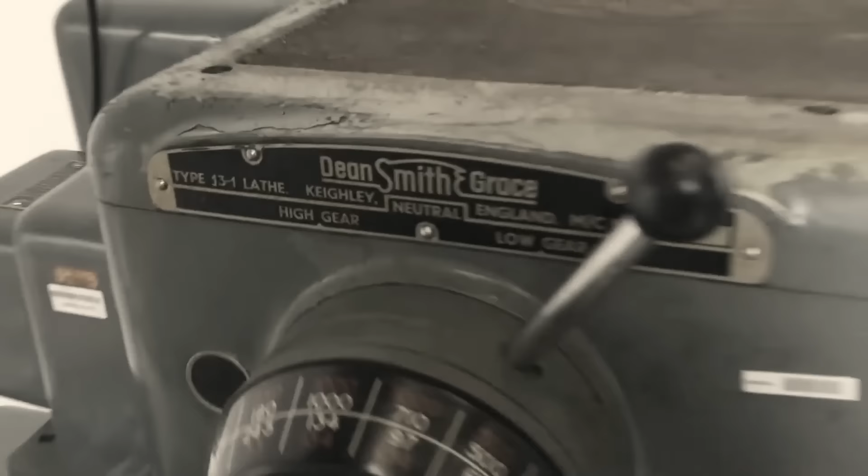Dean, Smith and Grace. If you ever served your time in a British toolroom, you knew the name, and you knew you had to earn the right to lay your hands on one of their lathes. These were the machines Rolls-Royce trusted to turn the parts inside its aero engines. At their peak, around 1,000 men in white made-to-measure overalls worked the Keighley shops, and 1 in every 5 lathes in wartime Britain came from beside the Worth.

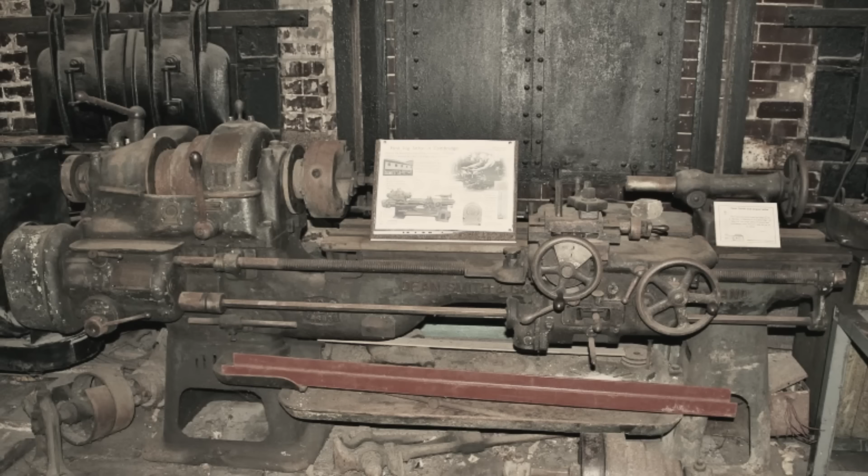They came through 2 world wars. They survived the Depression, foreign competition and rivals that fell away around them one by one. And then, after more than 120 years of making, the gates closed, and the town that had timed its very holidays to the works fell quiet. How does a firm the finest engineers in Britain trusted, a firm that survived everything, simply disappear from the town it built? Chapter 1: The Men Who Borrowed the Land.

Keighley sits where 2 rivers meet, the Aire and the Worth, in a fold of the West Riding, under the gritstone moors that climb towards Haworth. In 1865 it was a wool town, growing fast, loud with the clatter of looms. And in that year, 3 men borrowed money to buy a patch of land from the Duke of Devonshire, and set about building a works. Their names were Joseph Dean, James Smith and John Grace.

Dean was the eldest, born in 1824 over in Barnoldswick, a man the works would remember for the rest of its life as Old Dean. Smith had come into the world in 1834, Grace in 1840. 3 Yorkshiremen, none of them wealthy, all of them certain of one thing.

A town full of machines would always need someone to build the machines that built them. That was the trade they chose. Not cloth, not wool. Machine tools. The lathes and planers and boring mills that shape the metal everything else is made from. In a town that lived and breathed textiles, they went one level deeper. They would make the tools behind the tools, and on the land they'd borrowed against, beside the Worth, they raised the Worth Valley Works. It was a hard start.

Machine tools are a slow, capital-hungry business. You spend money for months before a single finished machine leaves the shop, and you carry the debt while you wait. For years the 3 men carried exactly that. There are stretches of the early story where the partnership's survival looks like a near thing, a matter of one good order arriving before the money ran out.

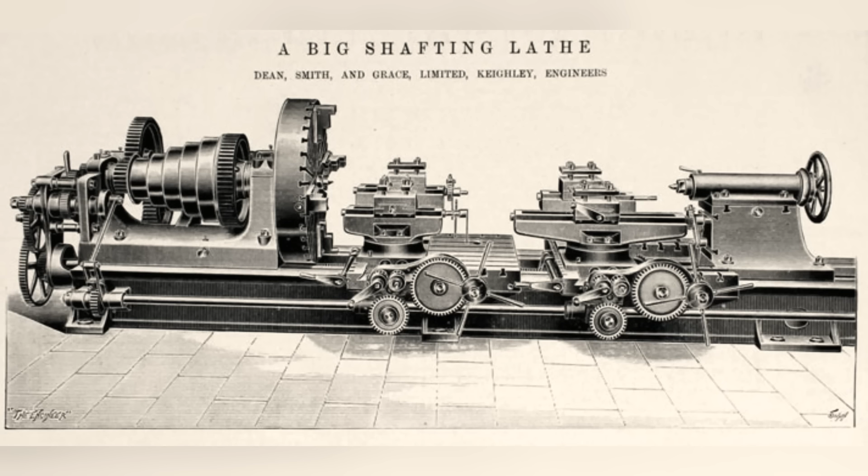But the orders came. By the 1881 census, the firm employed 75 men and 30 boys. A proper works now, apprentices coming through, a name beginning to travel. And by 1883, the debts were clear. They owned what they had built, outright, at last.

What turned it was the quality of the thing. A DSG catalogue from 1889 lists the customers they were already chasing and winning: locomotive builders, marine engineers, ordnance manufacturers, boiler makers, shipbuilders. Government contracts among them. This from a firm barely 20 years old, run by 3 men who'd started with borrowed money and a field. They were not making cheap machines for the local mills. They were making heavy, serious machines for the people who built the engines of an empire. And those people had noticed.

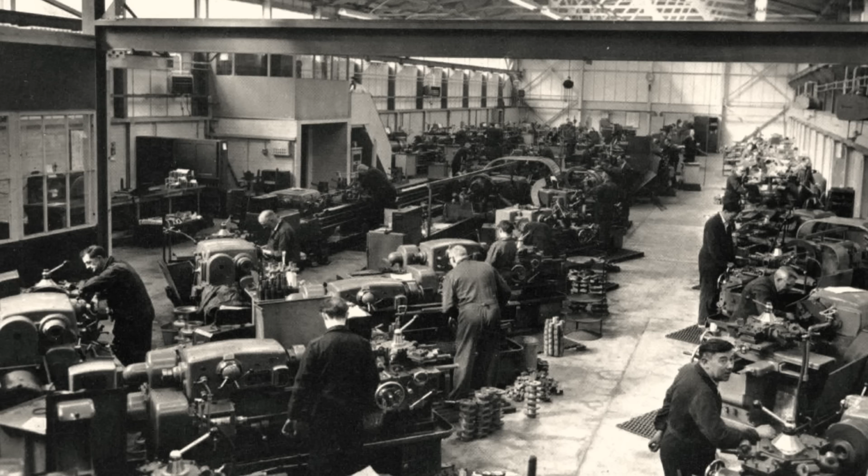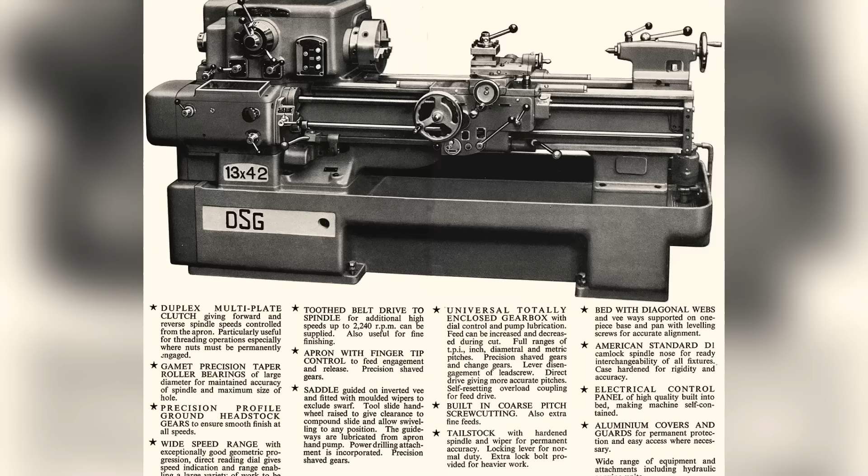There's a phrase that machinists still reach for, more than a century on, when they talk about a Dean, Smith and Grace lathe. They call it the Rolls-Royce of Lathes. It's worth understanding, before we go any further, exactly what that meant, because it wasn't a slogan the firm invented, and it wasn't loose praise.

It meant a machine built without compromise, hand-fitted by men who took days over work another firm would rush in hours, engineered so far beyond what the specification required that it would still be cutting true half a century later. It meant the most expensive way of doing a thing, done properly, because the people who built it could imagine no other way. That instinct, do it properly, whatever it costs, built the firm. In the end, it would also be part of what killed it. But that is a long way off yet.

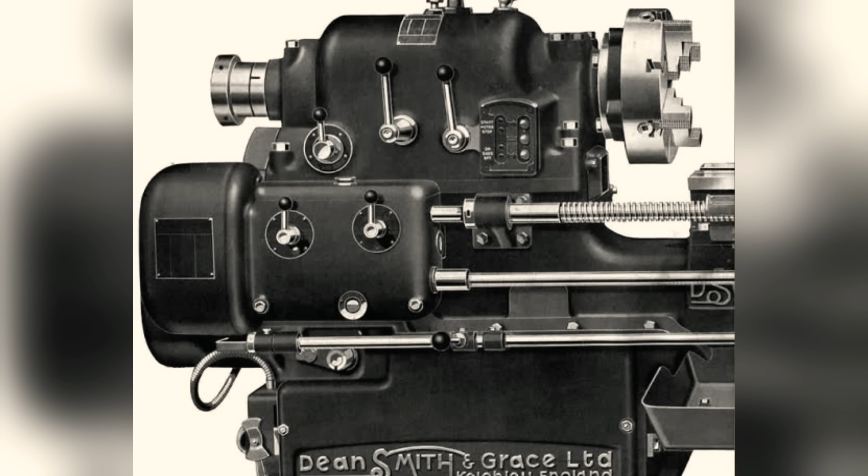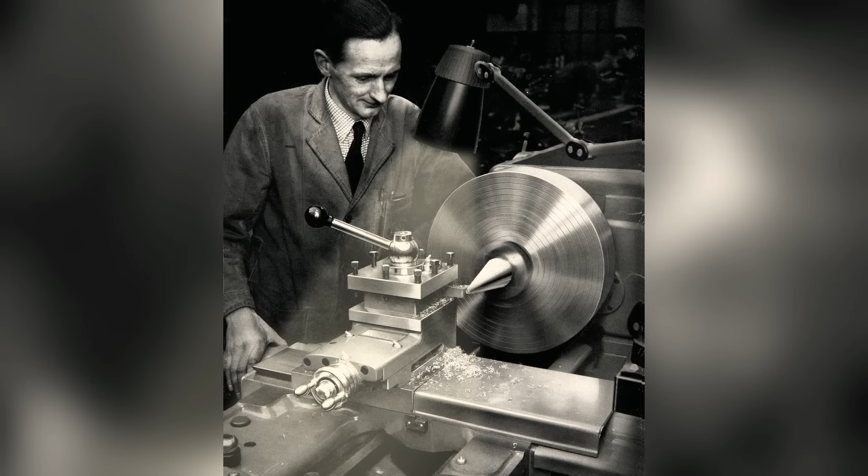In the 1880s and 1890s, it was simply making them the best in Keighley, and then among the best in Britain. The partnership formalised itself as the years passed. It became a limited company in 1898. 10 years later, in 1908, it reconstituted as a private company, Dean, Smith and Grace, 1908, Limited, the name it would carry through both world wars.

The founders were aging by then. Grace died in 1904, Smith in 1906, and old Dean himself in 1909 at 85, having seen the field beside the Worth become one of the great engineering names of the West Riding.

They left behind more than a works. They left behind a way of thinking about a machine, that its worth was measured not in what it cost to make, but in how long it would go on being true. Everything that followed grew out of that single, stubborn idea.

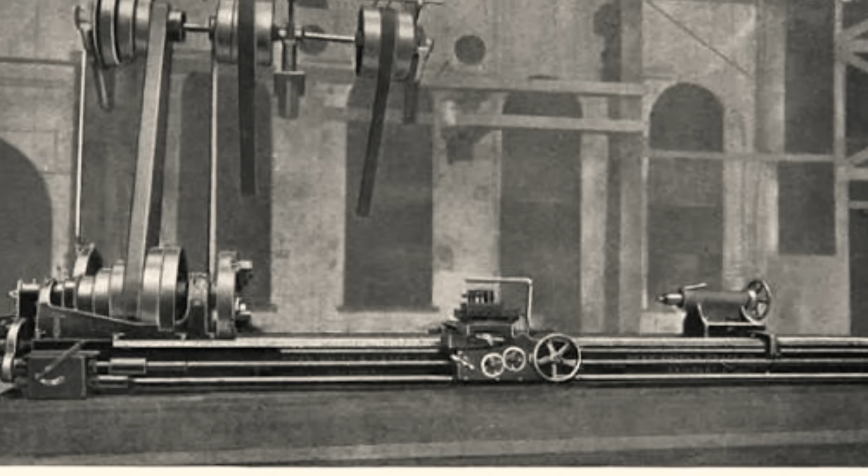Chapter 2: Built for brute force. The moment that made Dean, Smith and Grace what it became arrived not as a decision in a boardroom, but as a new kind of metal.

Around the turn of the century, a revolution swept through every machine shop in the industrial world: high-speed steel. Cutting tools made from it could bite into metal far faster than anything before, and they generated forces to match. Suddenly, the old lathes, built for gentler work, for slower speeds, began to flex and chatter and shake themselves loose under the strain. The tools had outrun the machines holding them.

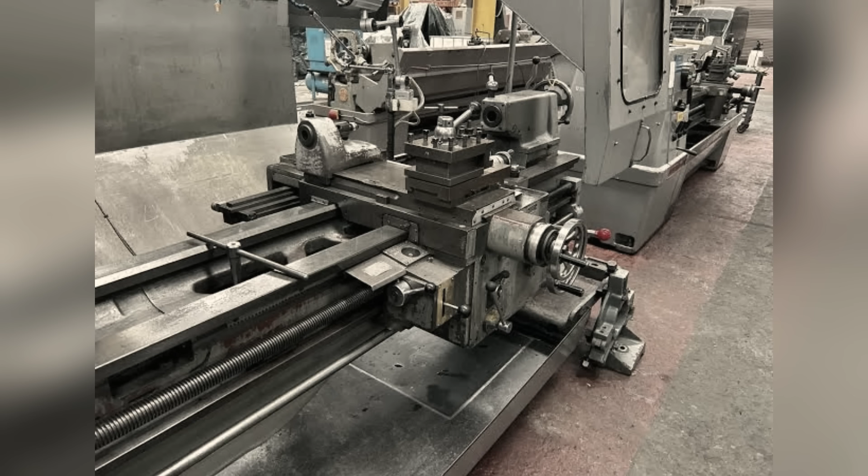Most firms responded by patching the old designs. DSG did something else. They stopped building bespoke machines to each customer's whim and concentrated instead on a single idea taken to an extreme: rigidity. A lathe so massive, so heavily geared, so utterly unwilling to move under load that the new steel could be driven as hard as it would go, and the machine would simply stand there and take it.

How far they took it is best measured by a figure from 1904, when the American trade journal American Machinist described a new 16-inch DSG lathe. It could strip metal at a rate of 1,800 pounds of chips an hour. 1,800 pounds, the better part of a ton of steel, reduced to swarf every hour by a single machine.

For its day, that was an astonishing, almost violent number. It announced that a small firm in a Yorkshire wool town had re-engineered the lathe around brute force and beaten the field at it. The engineering underneath was quietly brilliant.

The beds were cast not from ordinary iron, but from a high-strength mixture the trade called semi-steel, hard enough to register around 200 on the Brinell scale, ribbed diagonally, so the ways stayed stiff while the chips fell clear.

The headstock spindles were massive, carried on 3 bearings, the front bearing on the largest machines swelling to nearly 7 inches across. There was a patented spindle nose they called the fast lock, and the option of precision: Timken taper roller bearings, or plain white metal ones fitted by hand.

But the defining quality was simply mass. Weight. Their smallest lathe, the so-called baby of the range at 13-inch swing, weighed getting on for 3 times what a Colchester Student weighed, and 80% more than a Colchester 15-inch Triumph, a machine of larger nominal size. A DSG was, pound for pound, in a class of its own.

There's a line the enthusiasts use that captures the firm's whole attitude. It did not demean itself producing piffling little lathes. It made only, as they put it, very serious machinery.

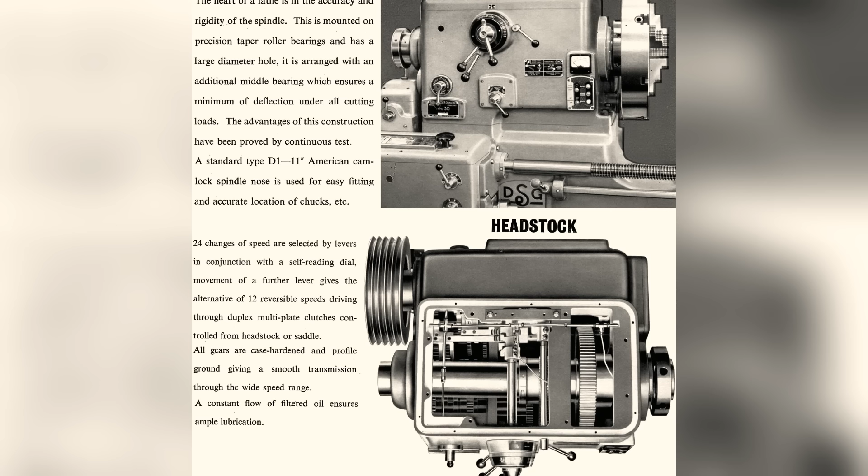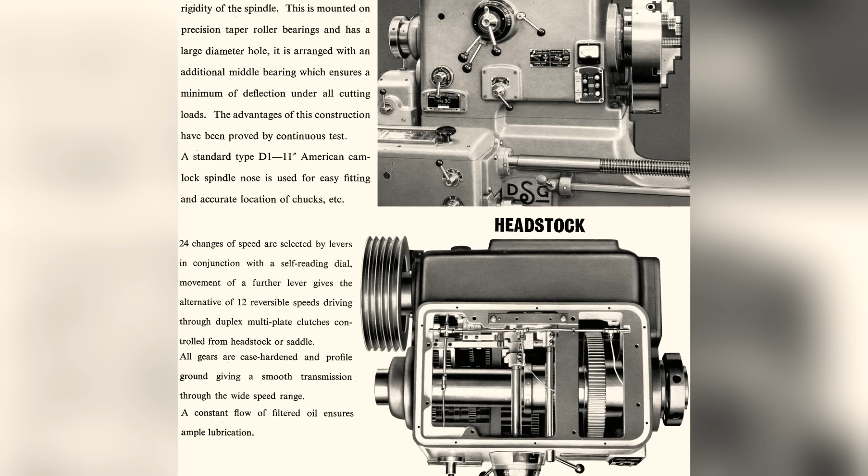It had rivals, and good ones. Britain in those years was thick with machine tool makers. Alfred Herbert of Coventry was the largest in Europe. Colchester turned out lathes by the thousand for training shops and general work. There were Harrisons and Wards and the Capstan lathes, and among the prestige names Holbrook and the elegant French machines from Cazeneuve. DSG didn't try to outproduce any of them. It planted itself firmly at the very top of the market and stayed there, building fewer machines, better, for customers who could tell the difference and were willing to pay for it.

Those customers were, by now, all over the world. DSG lathes went out across the empire and well beyond it, to Australia, to Japan, to Italy, the Netherlands, Turkey, Spain, Mexico, Argentina. A 1909 account of the great William Beardmore Works in Scotland records 2 DSG lathes of 21-inch centre height, running on beds 60 feet long, machines the size of railway carriages, built to turn the shafts of ships. A photograph survives of a DSG lathe installed in the Petone Railway workshops in New Zealand in 1924. The machines from beside the Worth had reached the far side of the planet.

One name from these years deserves a moment on its own. Before the First World War, a young engineer worked for the firm whose name would later belong to the air.

Herbert Smith went on from Keighley to become the chief designer at Sopwith, the man behind the triplane, the Snipe, and the Camel, the fighter that more than any other came to stand for British air power in the Great War. The aeroplanes that duelled over the Western Front were shaped, in part, by a mind trained in a lathe works in Yorkshire.

When that war came, DSG went to it. Trading now as Dean, Smith and Grace, 1908, Limited, the firm turned its heavy machines to the manufacture of breech blocks for guns and joined the national effort to produce shells. The value of the work was recognised at the very top. A letter from Lord Kitchener himself, dated the 22nd of October 1914, acknowledged what the Keighley firm was contributing to the fight. Barely a decade into the new century, a partnership that had begun with borrowed money was building the components of Britain's artillery, and being thanked for it by the Secretary of State for War.

Chapter 3. The Hands That Scraped the Steel.

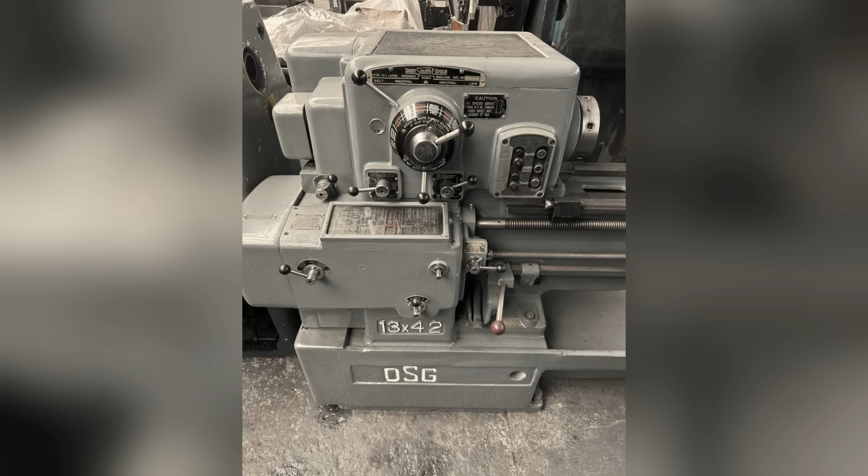To understand what Dean, Smith and Grace was at its height, you have to understand what happened on the toolroom floor, because the thing that made a DSG lathe extraordinary could not be cast or machined or bought. It could only be done by hand, by a man with a scraper, 1/1000th of an inch at a time.

Hand scraping is an old craft, and a nearly invisible one. When two metal surfaces have to slide against each other with absolute precision, a spindle in its bearing, a saddle along its ways, no machine finish is good enough. So a skilled fitter takes a hand tool and shaves away metal in tiny flecks, testing and shaving and testing again, until the two surfaces bed together so perfectly that they move like oil on glass.

On the finest DSG toolroom lathes, the bearings and slideways were scraped this way to accuracies finer than a 10,000th of an inch. To put that in human terms, many times thinner than a sheet of paper, thinner than you can see, thinner than you can feel with a fingertip. At Keighley they had men who lived for this.

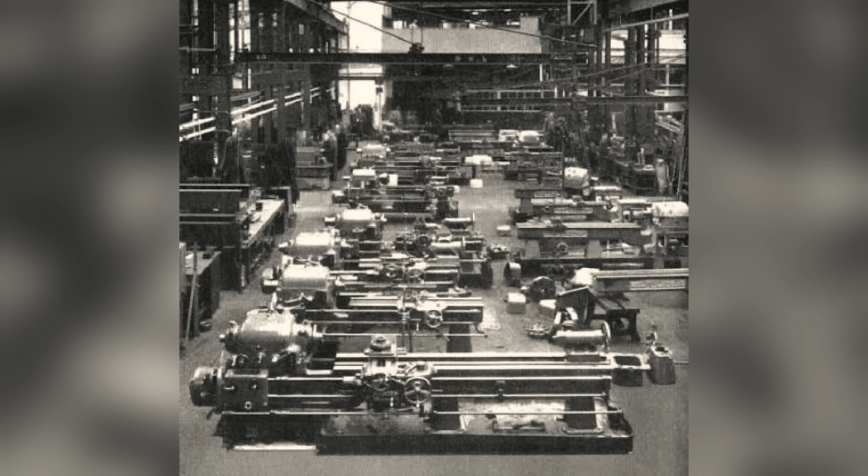On the special lathes built for Rolls-Royce, the finest work of all, a fitter named Donald Booth would spend day after day scraping in a single plain white metal bearing. He used red lead rather than the usual engineer's blue to mark the high spots, and he kept at it, hour after hour, morning into afternoon, sometimes for the better part of a week on one bearing, until the test was passed, and the test was severe.

A finished component would be measured on a Taylor-Hobson Talyrond, an instrument that traces the roundness of a surface with almost cruel exactness. The standard Booth worked to was not very good or within tolerance. It was that the Talyrond should show no bearing marks whatsoever. Nothing. A surface so true the instrument could find no fault in it at all. That was one man, on one kind of machine.

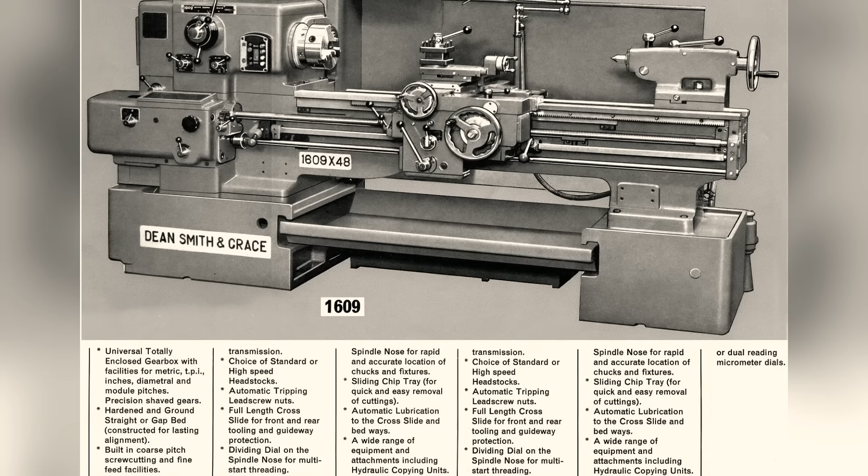There was another whose name the works kept. The 17T toolroom lathe, the jewel of the range, the one every serious shop wanted, was assembled by a single specialist fitter named Tommy Williams, not a team. One man, who built each 17T himself, start to finish, because he loved the work and, as the firm remembered it, wanted no other. He could have moved up, moved on, taken an easier or a better paid job. He chose to stay at his bench and build the finest small lathes in Britain, one at a time, for as long as they'd let him.

There is something almost unbearably tender in that, looking back. A man who found the thing he was good at, and the thing he loved, and discovered they were the same thing, and simply did it. Quietly, for years, in a shed in Keighley, turning out machines that would outlive him by half a century.

The floor those men worked on was a world of its own. The smell of it, cutting oil, hot metal, the particular mineral tang of swarf coming off steel. The sound, not the frantic din of a textile mill, but something heavier and slower. The deep turning note of the big spindles, the hiss of coolant, the ring of a scraper being drawn across a surface plate.

The light came in through high windows and caught the fine bright curls of metal peeling away from the work, and underneath everything, felt through the soles of the boots more than heard, the low steady weight of very heavy machines running true. The castings themselves began elsewhere, in the foundry, where the semi-steel beds were poured and then left to weather, sometimes for months, so the internal stresses in the metal could settle before a single cut was taken.

You cannot rush a DSG bed. It has to age, like timber, until it stops moving of its own accord. Only then does it come into the shop to be planed and bored and finally scraped by hand into something that will hold its shape for 50 years.

This was the paradox at the heart of the firm, and it was already visible on the floor, if anyone had cared to look. Every quality that made a DSG the best also made it slow and dear and dependent on a dwindling number of men who could do work that took years to learn. Tommy Williams, building his 17T alone, was a marvel. He was also, though no one would have said it then, a bottleneck, a single pair of irreplaceable hands.

The firm's genius and the firm's future weakness were, from the beginning, the very same thing. But in the golden years, that was a shadow no one saw. What they saw was the finished machine, gleaming under the shop lights, hand-scraped to a perfection no rival could match, and the man beside it, in white overalls, wiping down the ways with a rag, quietly proud of the best work in Britain.

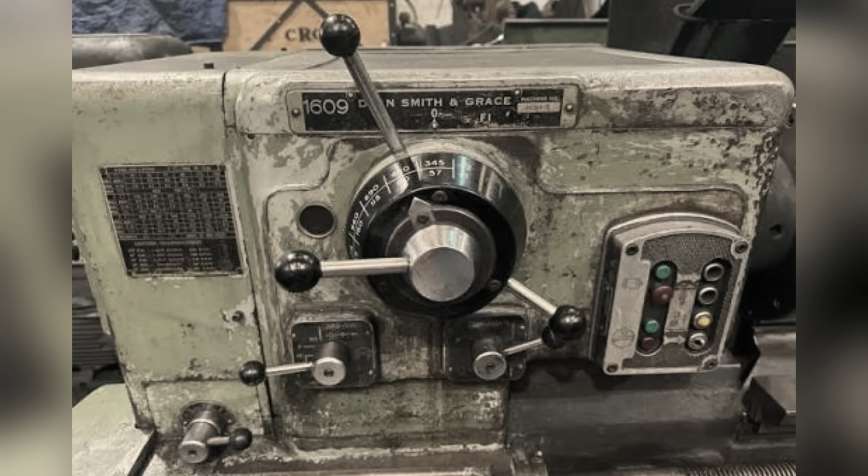Long service wasn't just noted, it was honoured, in at least one case, past 60 years with the one firm. Fathers followed sons into the gates, and sons followed fathers out. One man's father was a pattern maker there from 1964 until the very end, and his brother served an apprenticeship in the late 1980s. Whole families, whole lives, spent inside those walls.

The firm was so woven into the town that Keighley's holidays were arranged around it. When Dean, Smith and Grace shut for its annual break, the town's break followed, because when the work stopped, so much of Keighley stopped with it. That is what it means for a factory to be the heart of a place. Not that it employs people, but that the calendar of the town bends itself to the rhythm of the works.

At its peak, the firm employed around 1,000 men and women, a figure it would sustain remarkably, right up to 1990. The historian Tony Griffiths described it as conservative, paternalistic, and set to the highest possible standards in every field, from the sublime to the faintly ridiculous.

Everything was done properly because there was no other way to do anything. And then came the war that turned that obsession into something the whole nation depended on.

From 1938, the firm was run by Sir Harry Smith, alongside James Pearson and Bert Laycock. When the Second World War came, Dean, Smith and Grace went onto a footing few firms of its size ever reached. It built lathes for every branch of the armed forces, for the Army, the Royal Navy, through the Admiralty, and for the Ministry of Supply.

It became one of the first traditionally all-male engineering firms in the district to bring women onto the shop floor in real numbers, the men away at the front, the machines kept running by wives and daughters and sisters, and it reached an output that is difficult to grasp even now.

At the peak of the war effort, Dean, Smith and Grace was producing 107 machines a month, one firm, in Keighley. That output meant that 1 in every 5 lathes made in the whole of Britain, a full fifth of the nation's entire production, was coming out of the works beside the Worth. When Britain called for the machines to arm itself, this small Yorkshire firm answered with a fifth of the total.

It even paid for its own Spitfire out of its own pocket in the National Fighter Fund, a single works buying a fighter aeroplane for the country. That was the summit of the firm's importance, and it flowed directly from the reputation the machines had earned. Because here is the double meaning buried in that phrase, the Rolls-Royce of Lathes.

It was not only that a DSG was built to Rolls-Royce standards of quality, it was that Rolls-Royce itself, the maker of the aero engines that powered Britain's aircraft, used Dean, Smith and Grace lathes to build its engine parts and recommended them to its own overseas overhaul facilities. The finest engineering firm in the country reached for a Keighley lathe when the tolerances truly mattered.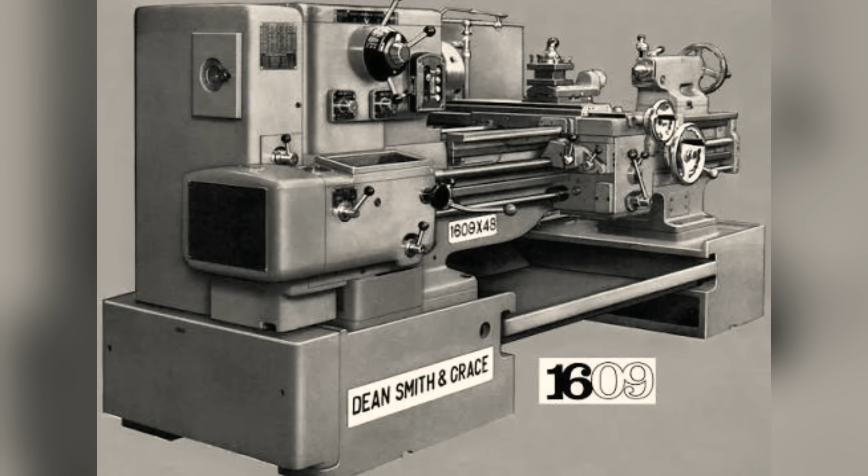Through the 1950s, the order books were full and the reputation was secure. By 1960, the firm was building engine lathes from 13-inch swing up to 30, alongside surfacing and boring lathes and its celebrated precision toolroom machines, its offices modernized with the latest labor-saving systems. It employed 700 people in 1961 and would climb back towards 1,000.

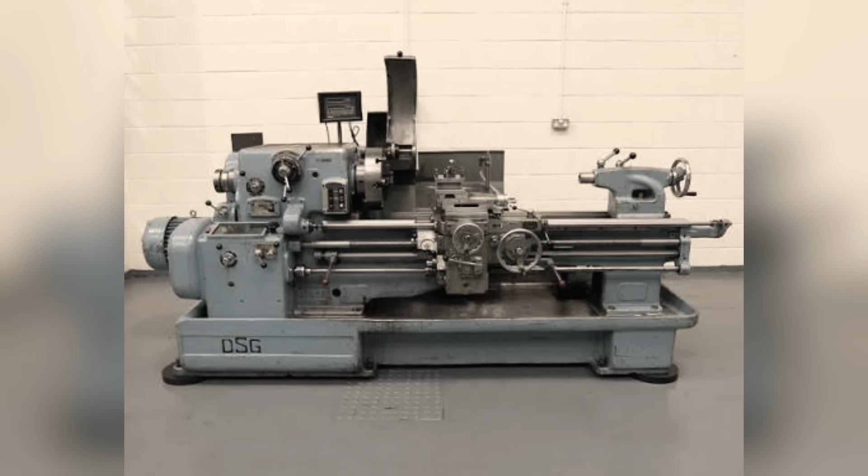In 1965, it reached its centenary, 100 years to the year since Dean, Smith and Grace borrowed the money to buy the land. 100 years of building the machines that built everything else. The firm marked it as such a firm would, soberly, proudly, with a photographic tour of the works, men in their white overalls standing beside the machines they'd made.

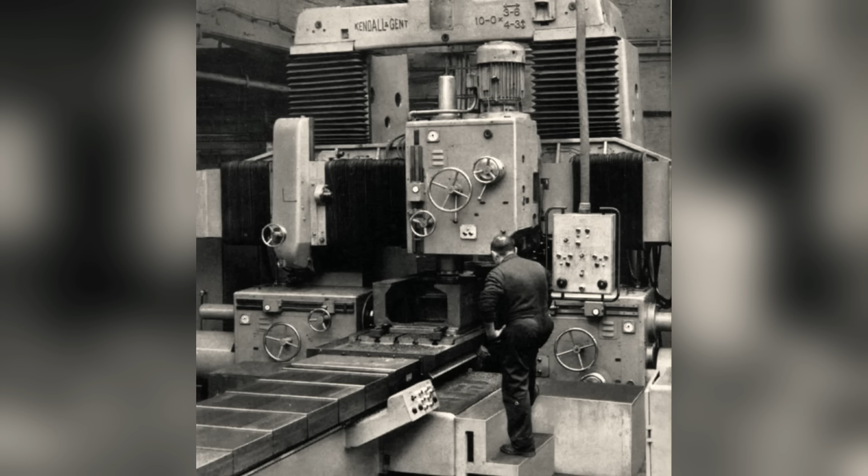A century old, and by common consent, still the finest maker of manual lathes in Britain, and perhaps anywhere in the world. Standing in 1965, on that anniversary, everything looked as solid as the machines themselves.

The name was known across the globe. Rolls-Royce trusted it. Railways and shipyards and tool rooms from New Zealand to Canada ran on it. 1,000 skilled people drew their wages from it in a town whose very holidays bent to its calendar, and the men on the floor were building, by hand, to a standard no competitor had ever matched.

But the qualities that had carried the firm to this summit were every one of them about to be tested by a world that was changing faster than Keighley could feel from the inside.

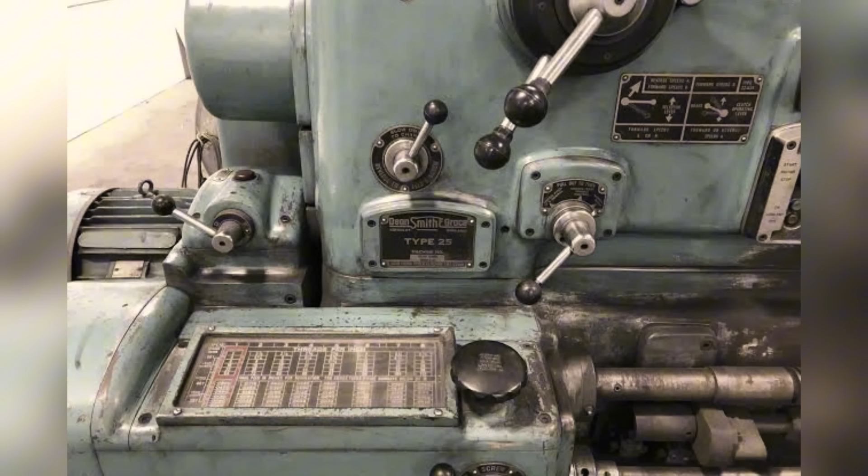Because a DSG lathe was, by its nature, virtually custom-made, massively heavy, hand-fitted, hand-scraped, weathered in the foundry for months, then finished by irreplaceable men who took days over work that could not be hurried. Each machine was a small masterpiece, and each machine took time, and craft, and a depth of skilled labour that grew rarer every year. That had always been the firm's glory.

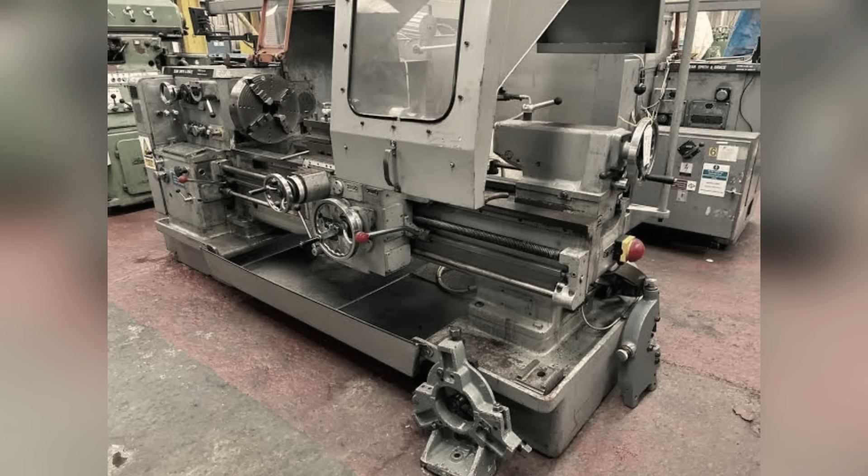It was about to become its exposure. For elsewhere in the world, engineers were building a different kind of machine entirely, one that did not need a Tommy Williams or a Donald Booth, one that could be told what to do by a set of instructions, and would then repeat the task unattended, to tolerance, all day and all night. The lathe was about to stop being a thing you earned the right to touch, and become a thing you programmed, and the makers who understood that first were not in Keighley, or Coventry, or anywhere in Britain at all.

At the centenary, in 1965, no one inside those walls was looking at the horizon. Why would they? They were the best in the world at what they did, and they had been for 100 years. They were standing at the very summit. They could not yet see the cliff.

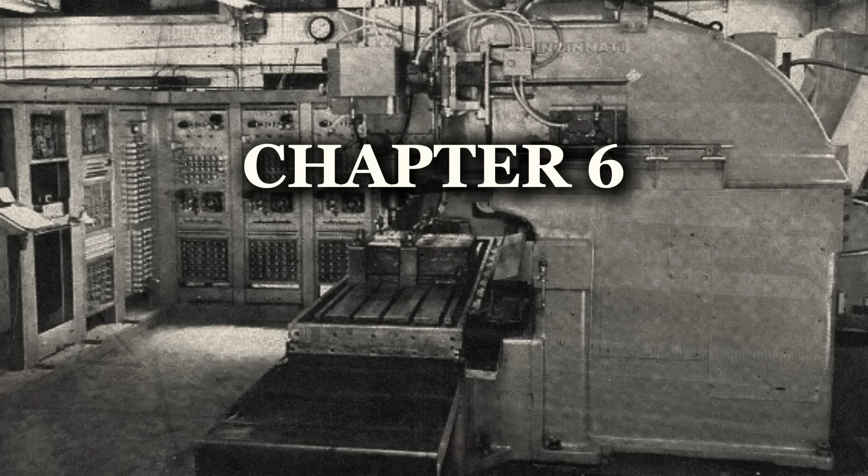Chapter 6: The machine that needed no hands. Something was happening on the far side of the world, and Keighley could not feel it.

It had begun, quietly, in America, in the laboratories of MIT in the late 1940s, where engineers worked out how to control a machine tool, not with a man's hands, but with a set of numerical instructions. Numerical control, they called it. At first, it was crude and huge and hideously expensive and easy to dismiss, but it did one thing that no craftsman, however gifted, could ever do.

It could repeat a task exactly, the same cut, the same tolerance, the same part, over and over, unattended, through the night, without tiring, without varying, without needing to have earned the right to be there. The Japanese saw it clearly, and they moved with a patience that ought to have frightened everyone watching.

Mori Seiki had come into machine tools in 1958 and had numerically controlled lathes by 1968, but it was Yamazaki Mazak that drew the map the whole world would follow. In the mid-1970s, Mazak built its slant-turn turning centres. The beds set at an angle so the swarf and coolant fell away clear, the whole thing wrapped around a FANUC control bought in from a specialist rather than built in a back room.

And then Mazak did something cleverer still. It built a control it called the Mazatrol, an early conversational system that let a machinist talk to the machine in something close to the language of the workshop, rather than in raw code. A man who had spent his life at a manual lathe could learn it. The barrier came down, and the slant turn became the template, the shape of the modern CNC lathe, copied and refined by every maker on Earth for the next 30 years.

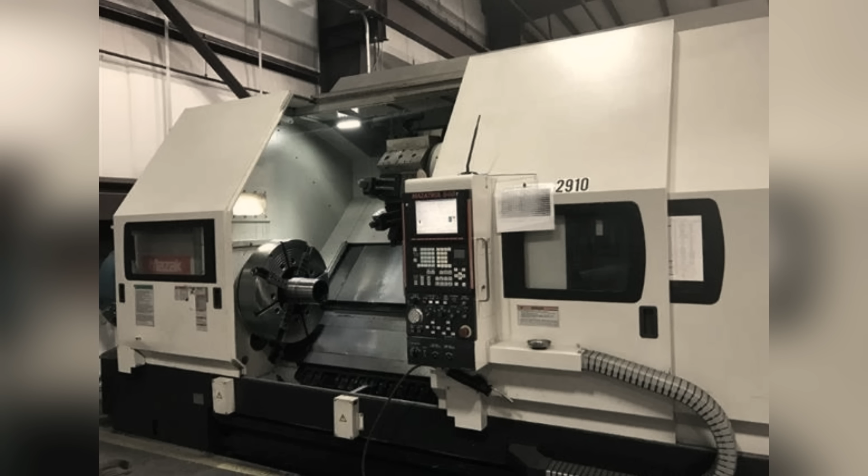The Japanese did not beat DSG on quality of craftsmanship. They made craftsmanship, in the old sense, beside the point.

Here we must be careful, because the easy story, the story that gets told about Dean, Smith and Grace and put into documentary titles, is that the firm was too proud, too set in its ways, and simply refused to build these new machines, that its craftsmen sneered at electronics and clung to the scraper until the world left them behind. It is a tidy story. It is also not true.

Dean, Smith and Grace exhibited a numerically controlled lathe that was reported in the Engineer in June 1968. The same year Mori Seiki reached the same point in Japan. The firm went on to build a whole run of computer-controlled machines, the CNC 250 and the CNC 305, a numerically controlled lathe called the 30TC, a CNC version of a design called the Metalist, and as late as 1990 to 1992, a new 8-inch chuck machine they called the Slant 200.

DSG did not refuse the future. It saw the future, and it built for it. The men in Keighley knew perfectly well what a Mazak could do. They were engineers, not fools, and some of the best in the country. The trouble was never willingness.

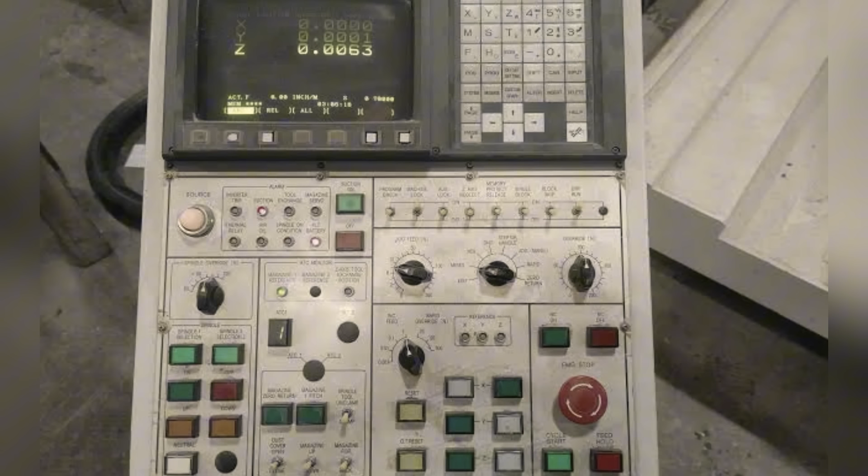The trouble was that building the future takes capital, huge, sustained, patient capital, and it takes a healthy market to sell into. And by the time DSG needed both, it had neither, because all around it, the entire British machine tool industry was quietly dying.

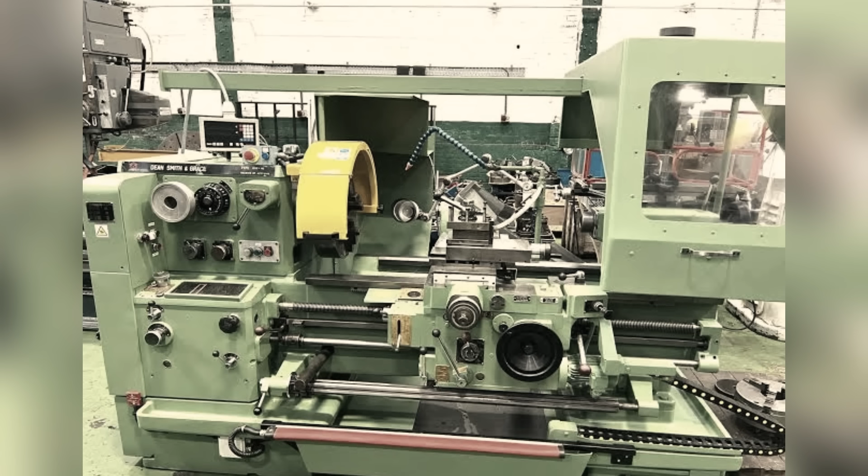Consider the flagship, Alfred Herbert of Coventry, once the largest machine tool maker in all of Europe, the giant of the British trade, the firm against which every other measured itself. By 1975, it was in such trouble that the Secretary of State stood up in the Commons and told the House that its survival would need a radical reconstruction of its capital and up to £25 million of public money.

The money went in. It was not enough. When the National Enterprise Board later refused to keep funding it, debts of some £17 million pulled the whole thing down, and Alfred Herbert, the largest in Europe, went into receivership in 1982. If the giant could fall, what chance the specialist beside the worth?

And the giants had made their own mistakes in miniature, mistakes that revealed the deeper British disease. British firms had been slow to adopt numerical control at all, slow while the Japanese were already shipping, and when they finally did move, some of them, Herbert among them, made a decision that looks, in hindsight, almost tragic in its pride.

They insisted on building their own electronic control systems in-house, chasing a competence utterly outside anything they had ever known, pouring money into electronics laboratories, while the Japanese simply bought proven FANUC controls off the shelf and got on with the business of selling machines. The British firms wanted to own the whole thing, as they always had, as the craft tradition had taught them, and in an age of bought-in electronics, that instinct bled them white.

Over all of this fell a series of economic hammer blows that no amount of good engineering could withstand. The oil crisis of 1973, which sent the cost of everything spiralling. The sterling crisis of 1976, so severe it forced Britain to go, cap in hand, to the International Monetary Fund for a loan of £2.33 billion. And then, worst of all for a firm that had lived on exports since the 1880s, the pound itself turned into a weapon aimed at British industry's heart.

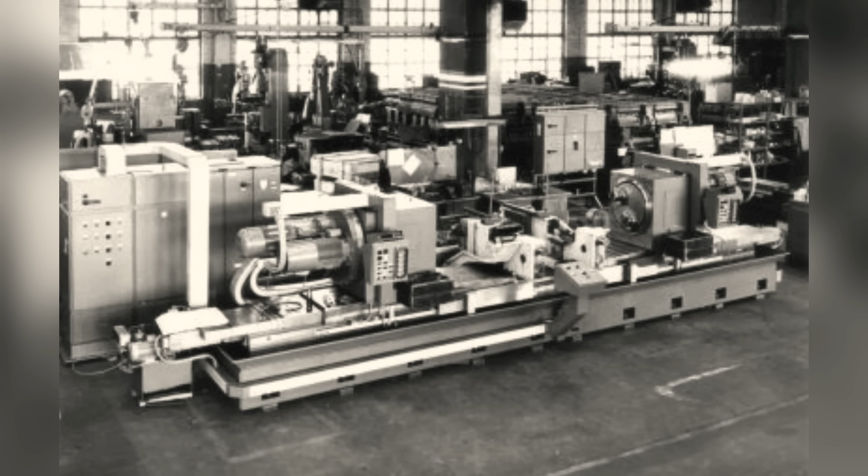He goes to his customer with the same fine machine he has always offered. The same steel, the same scraped bearings, the same 50-year guarantee of truth built into every casting. And the price on the invoice, in the customer's own currency, has risen by nearly half. Not because the machine costs more to make, because the pound has risen against the dollar while he wasn't looking. His Japanese rival, meanwhile, offers a CNC machine that costs less, does more, and runs all night.

The order does not come. It does not come the next year either. For an export firm, that exchange rate was not an inconvenience. It was a slow strangulation. The deep manufacturing recession of 1980 and 1981 followed, and it fell hardest of all on exactly the kind of firm Dean Smith & Grace was. Heavy, traditional, export-dependent, and proud.

This was the world closing in around the works. Not one enemy, a gathering of them, arriving together. The craft was still supreme. The machines were still the best in Britain. And none of it was going to be enough, because the ground the firm stood on was giving way beneath the whole industry at once.

Chapter 7. The American Offer.

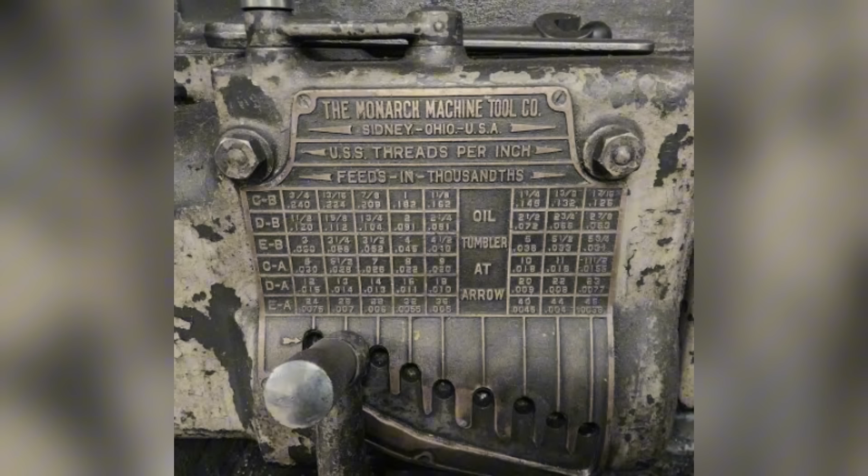In this closing world, an offer arrived from across the Atlantic, and to the men who received it, it looked less like a threat than a lifeline. The Monarch Machine Tool Company of Sidney, Ohio, was itself a world-class builder of lathes, one of America's finest.

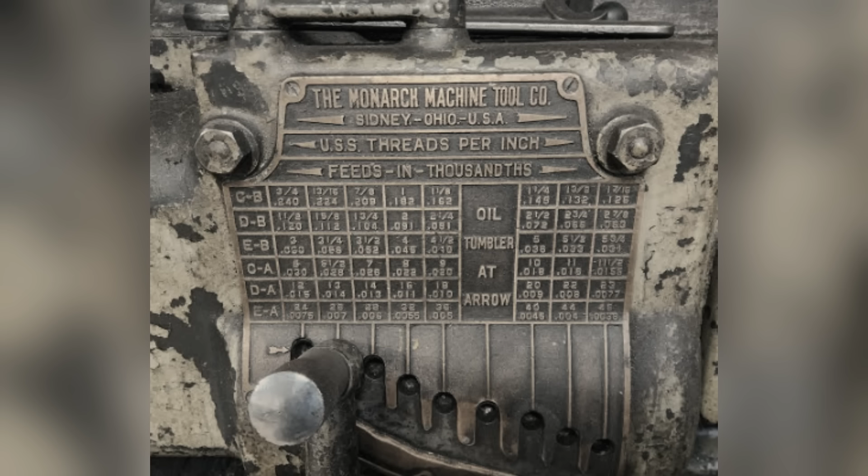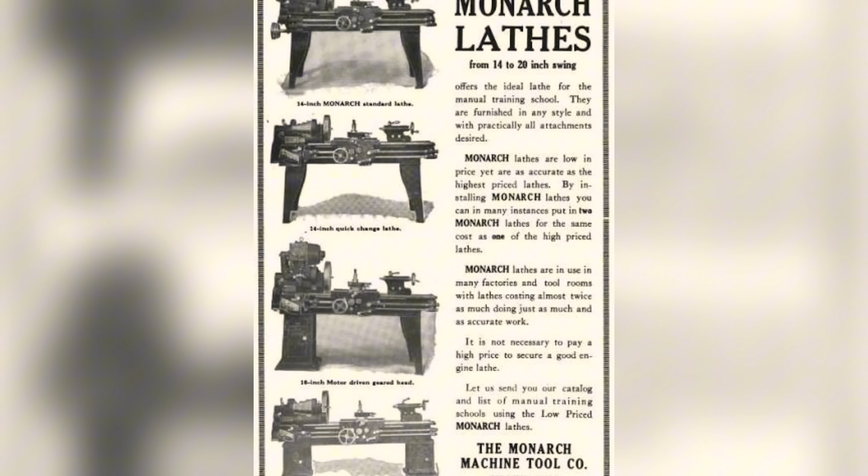It was cash-rich, where DSG was capital-starved. It was modern, where DSG was traditional. And it wanted two things that Keighley had: the firm's deep engineering expertise to help modernize Monarch's own aging range, because Monarch too could feel the Japanese pressure and knew its products were growing old. And it wanted DSG's foundry, which could pour castings for Monarch's American divisions at Sidney and Cortland. There are signs, too, that DSG had already been quietly designing a modern range of its own, with help from Rolls-Royce, the very kind of forward-looking work that a cash-rich parent could bankroll all the way to production.

So the independent firm, a firm that had stood on its own since 1865, that had never in over a century had an outside corporate owner, that had come through two world wars answering to no one but itself, was sold to Monarch. The precise year is oddly hard to pin down. The records disagree between 1973 and 1974, and the deal may well have been agreed in one year and completed in the next. The best documentary evidence points to 1974. Whatever the exact date, the fact of it was plain: Dean Smith & Grace became the DS&G division of an American corporation.

And on the day it happened, it genuinely looked like the right decision. Here was a strong, wealthy, expert parent that understood lathes down to the bone, that respected what DSG was, that had the money to do the modernization the firm knew it needed and could no longer afford alone. A struggling specialist taken under the wing of a giant that spoke its own language. What could be more sensible? A man reading the announcement in the Keighley News that year might reasonably have felt relief. The firm was safe. The Americans had money.

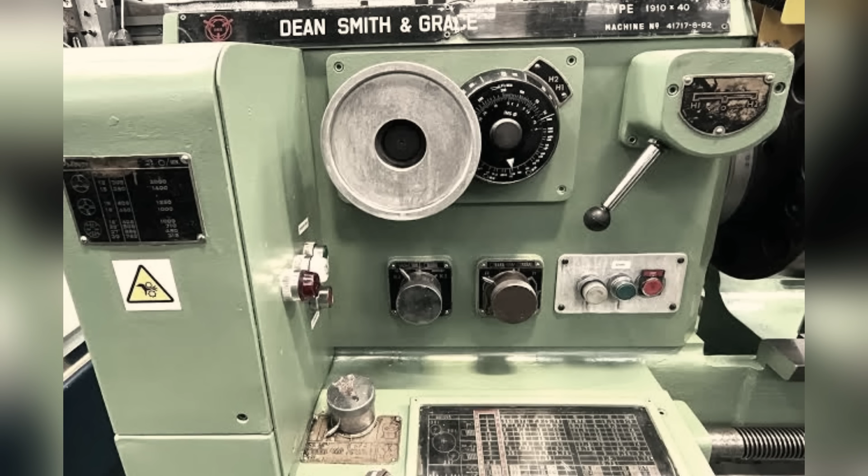The future would be paid for. The trouble with a decision like that is that its wisdom depends entirely on what the new owner does next. And what the new owner does next depends on things happening inside that owner's own walls, thousands of miles away, that the workforce in Keighley could neither see nor influence. You can make a perfectly reasonable decision and still have it destroy you, if the ground shifts under the man you've tied yourself to. For a time, it went well enough.

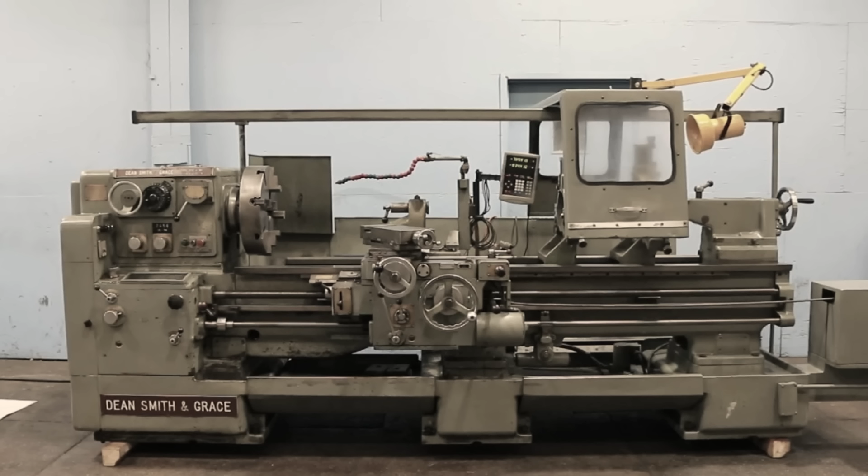In these years, Monarch had, by the account of John Legger, a Monarch engineer who worked there from 1987 and knew the story from the inside, whose testimony is the closest thing this story has to a witness in the room, a very strong management team. And when Monarch first bought DSG, Legger recalled, the firm was still run by lathemen, people who understood the machines in their hands, people who knew what a scraped bearing was worth and why a bed had to weather for months before it could be trusted.

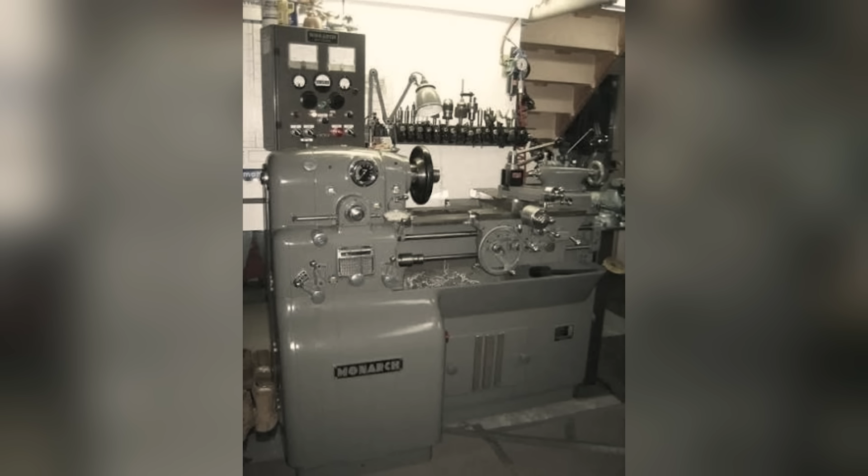The craft was safe for now, because the men above it still spoke its language and valued what it produced. But two companies had now bound their fates together, and neither could see what was coming. Both of them were about to walk into the same storm, the machine tool depression that ran from 1981 to around 1985 and hit the American parent and its English division hard at exactly the same time, in exactly the same way. And here is the cruel arithmetic of it: when both companies are bleeding at once, the strong one cannot rescue the weak one. It is too busy trying to save itself. The lifeline had tied DSG to a swimmer who was, unknowingly, about to start drowning too.

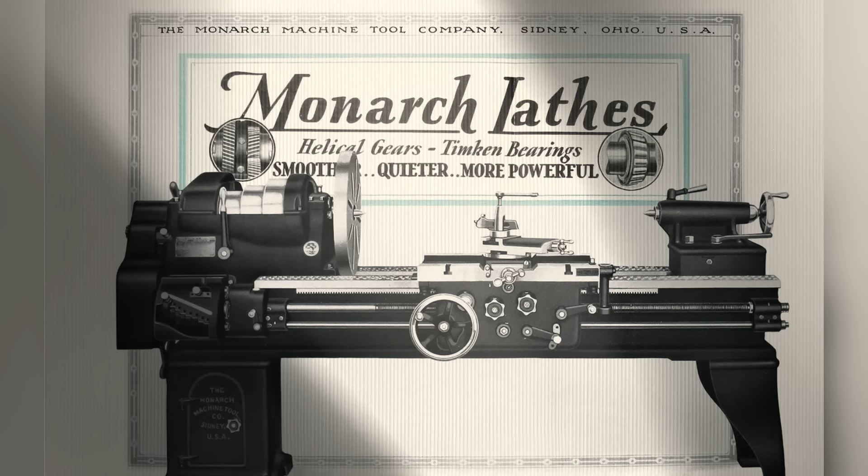That was the real shape of the trap. Not a betrayal. Not a villain twirling a moustache in an Ohio boardroom. A reasonable decision, made in good faith by sensible men on both sides of the Atlantic, that tied a struggling firm's survival to the health of a parent that was about to fall ill itself, just as the whole industry entered its very worst years. The decision was sound the day it was made. The world simply refused to cooperate with it.

Chapter 8: The Foundry That Was Left to Starve.

If there is a single fatal decision in this story, a moment where the thing might genuinely have gone differently, it is not the sale to Monarch. It is what Monarch did, or rather did not do, in the years that followed. Listen to John Legger again, who was there, describing it in words that carry the weight of a man who watched it happen from the inside.

When Monarch bought DSG, it was still run by lathemen, and Monarch had a very strong management team then. But in the mid-80s, the parent loosened its control over the English division too much. It let go of the reins at precisely the moment they most needed holding. And the consequence showed up first, and most damagingly, in the one asset that had made DSG worth buying in the first place: the foundry. That foundry, the works on Lorcombe Lane.

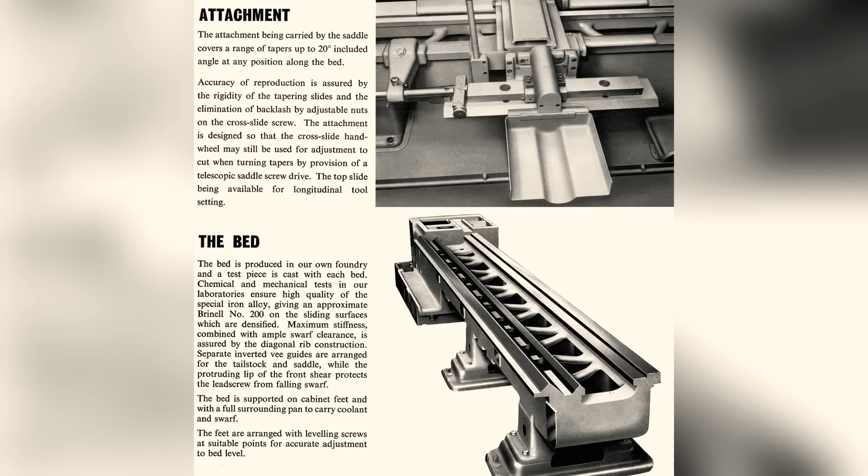The Nelson Works, built between 1962 and 1965, in the last confident flush of the Golden Age, was where the whole thing began. It was where the semi-steel beds were poured and then set aside to weather, sometimes for months, until the stresses eased out of the metal and it stopped moving of its own accord. It was the beating heart of the firm's quality, the source of everything that followed, and it had been one of the great prizes of the whole acquisition.

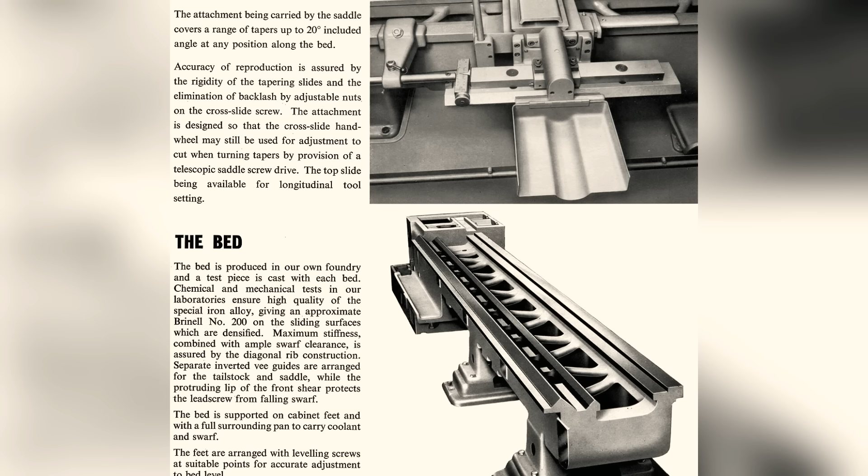The reason in part that Monarch had wanted DSG at all. And in the mid-1980s, with control loosened and attention turned elsewhere, it began to slide. It grew inefficient. Its quality began to suffer. The very source of DSG's greatness started quietly to decay from want of care, not from any single act, but from the slow accumulation of deferred maintenance and postponed investment and attention that never quite arrived.

What it needed was a modernization program, real investment, sustained over years, to bring the foundry and the whole operation up to date. Everyone who understood the firm knew it needed one. The engineers on the floor could see it plainest of all, watching the castings and knowing what they should be. And by the time it was needed most, Monarch didn't have the cash to provide it.

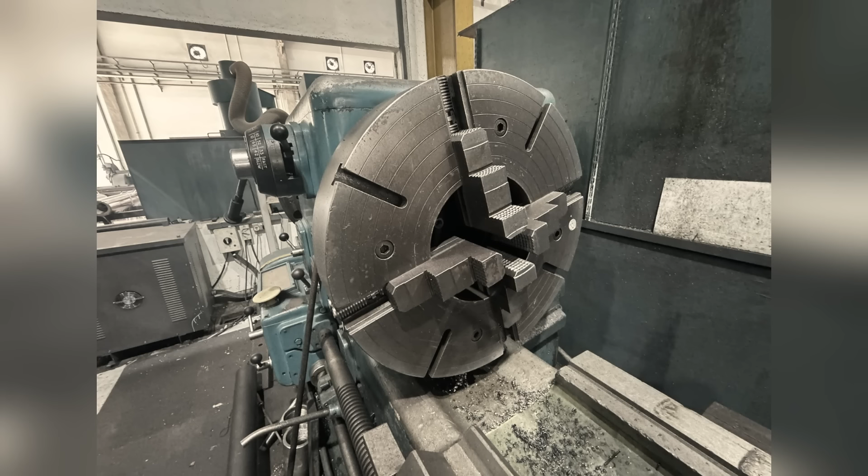Because Monarch, by then, was fighting for its own life on its own side of the ocean. The parent's troubles had been mounting, one on top of another, through the very years it should have been reinvesting in Keighley. It had been badly weakened by a long strike in 1975 and 1976, before the DSG relationship had even properly matured. Its own product line had grown expensive and stagnant, the same disease that had felled Alfred Herbert, the same age catching up with the same kind of proud old firm.

Then came the failures. A series of prototype machines called the C line, meant to be Monarch's answer to the future, came to nothing and were finally scrapped in 1989. Years of engineering effort and money poured away. And an ambitious project called the Ultra Centre turned into a slow, grinding disaster, its warranty costs running out past whatever profit it had ever managed to make. A machine that cost the company more to stand behind than it ever earned.

These were the years, the mid and late 1980s, when the cash that might have modernized the Keighley foundry was instead being consumed by the parent's own failing bets.

Presiding over the culture that shaped these years was a figure worth pausing on. Kermit Cook had joined Monarch back in 1935 and become its president in 1961, a man of the old American machine tool aristocracy who had run the company through its confident post-war prime. He retired in 1979, but he did not let go. He kept his seat on the board of directors, and by Legger's account, he had a very demanding personality that went on pressing itself upon the company he had led long after he had formally handed it over.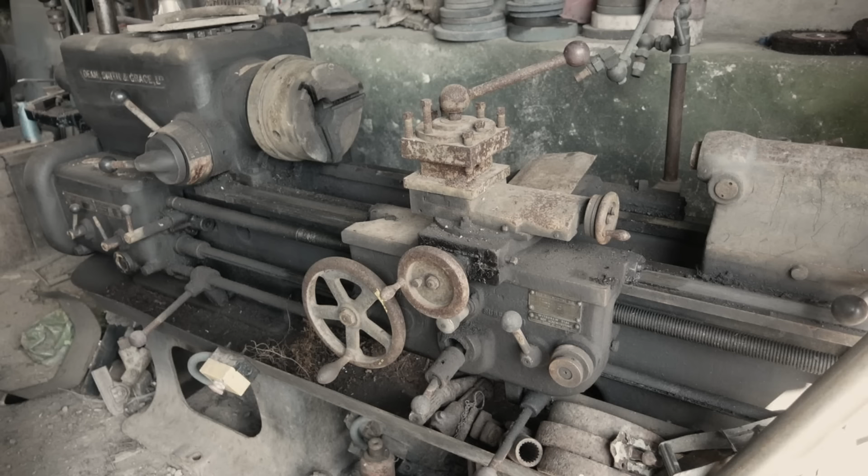But a firm cannot live on craft alone when its foundry is failing. Its parent is drowning in its own failed projects. The pound has priced its exports out of every market it once owned, and the Japanese are selling CNC machines by the thousand into the space where DSG used to stand.

Craft was necessary. Craft had never been the problem. Craft was simply, now, no longer sufficient, and nothing the men in white overalls could do at their benches could change a single one of the forces bearing down on them from the wider world.

The end, when it came, would come from Ohio, but it had been decided in truth years before, in every single quarter when the investment that might have saved the works was not made, because there was nothing left, anywhere in the group, to make it with.

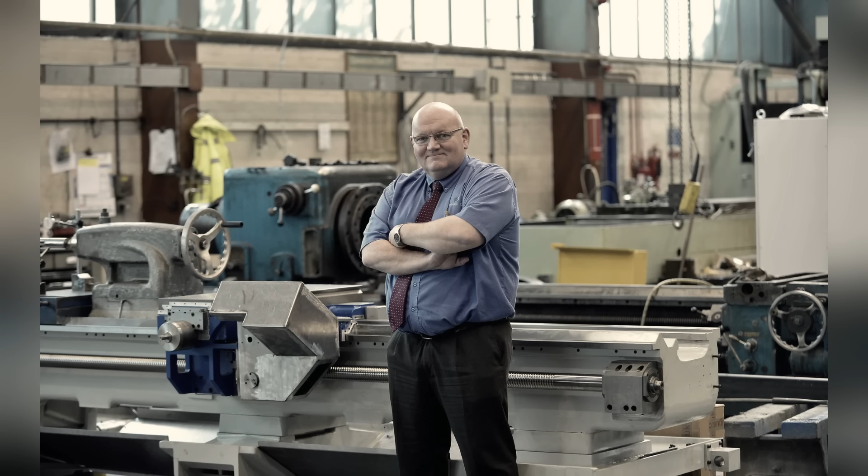Chapter 9. A fortnight before Christmas. On the 11th of December 1992, Monarch announced that it was closing and selling the Dean Smith & Grace facility in Keighley. A fortnight before Christmas. That was the end of it.

The end of large-scale manufacturing beside the Worth. The end of a line that ran back 127 years to 3 men and a borrowed field. Around 1,000 people had worked here at the peak, and the firm had held near that number as late as 1990. Now the gates were to close.

The honest truth is that we do not have in the public record the granular detail of those final months, the exact tally of redundancies, the precise dates of the last rundown, the names of the last men to clock out on the last day. Those figures are simply not in the heritage archives or the surviving trade press. They live, if they live anywhere, in the memory of the town, in the Keighley news of that winter, in the families who were there. It is an honest gap, and it deserves to be named as one, rather than filled with invention.

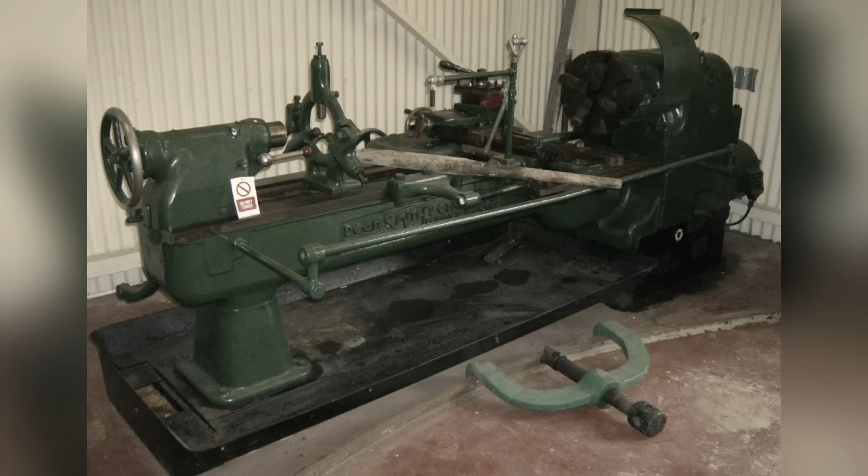But we know what a closure like that means, because it is the same in every industrial town in Britain, and it is never, ever abstract. It means a man who had worked at DSG for 30 years, who had earned the right to it, who had almost come to blows once for the privilege of using it, packing his tools into a box. It means the last castings cooling in a foundry that would pour no more.

It means the white overalls, made to measure, hung up for the final time. It means a works whose calendar the whole town had once arranged itself around, falling silent in the run-up to Christmas. The presses stopped, the spindles still, the deep turning note that had been the town's background hum for over a century, simply gone.

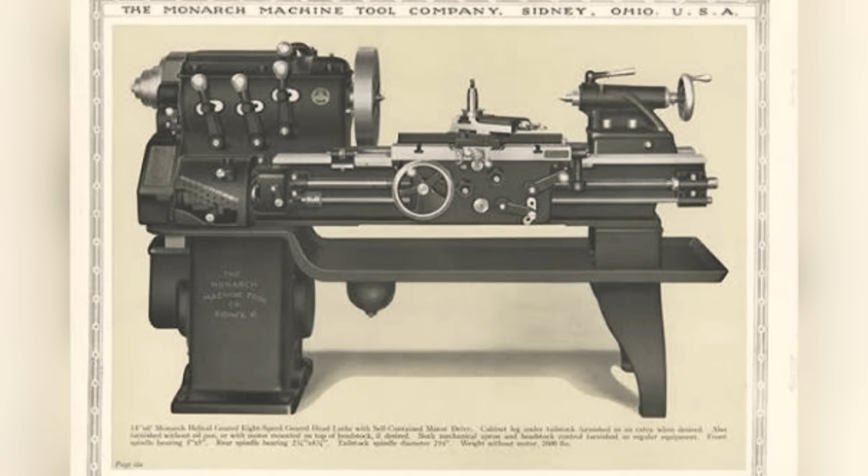A works that had survived 2 world wars, a works that had made 1 in 5 of the nation's lathes when the nation needed them most, a works whose machines Rolls-Royce trusted with its finest engine parts. It did not fall to catastrophe or scandal or a single arrogant blunder.

It closed quietly a fortnight before Christmas 1992 because the industry it belonged to had already died around it, and its distant parent had run out of the money and the will to keep one English division alive.

There was a coda still to come, easily confused with the closure, but separate from it. The old Monarch-era corporate shell was formally wound up 3 years later. A liquidation notice appeared in the London Gazette in December 1995. But that was paperwork, the tidying away of a legal entity long after the fact.

The real ending, the human ending, the one the town actually felt in its bones, had come at the end of 1992. Everything after was aftermath.

Chapter 10. The name that would not die. And yet, and this is the strange, stubborn grace of this story, the name did not die.

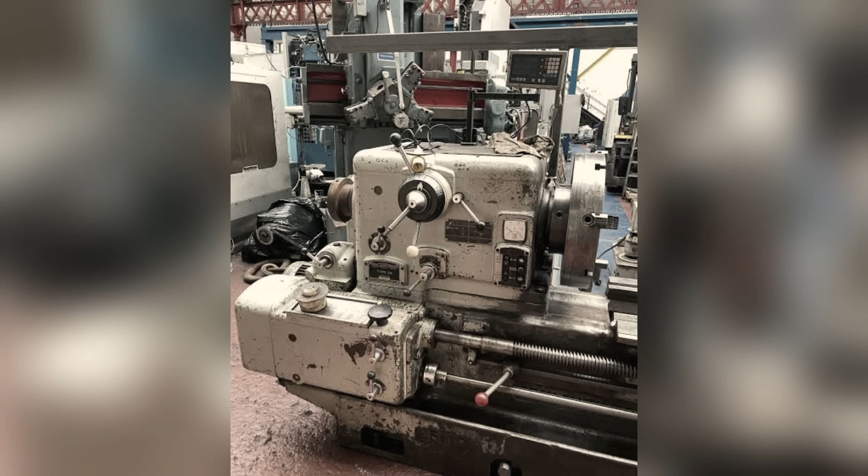Almost uniquely among the great British industrial collapses, Dean Smith & Grace refused to become simply a memory. On the 5th of April 1993, only months after the closure, a privately owned Keighley company called DSG Lathes Ltd bought the assets and carried on, building manual and CNC lathes, rebuilding old machines, supplying spares to the hundreds of DSG lathes still working around the world. The heart had stopped, but a pulse remained.

Then, on the 1st of February 2005, came a genuine attempt at revival, led by a man whose whole life had, in a sense, prepared him for it. Nigel Granger was an ex-Rolls-Royce apprentice, trained in the very tradition of precision that Dean, Smith and Grace had served for a century. There is a rightness to that which needs no underlining.

He completed a management buyout, revived the full Dean, Smith and Grace name, and set about rebuilding what he could. He pushed turnover from under £1 million in 2004 towards £2.25 million, and fittingly, perfectly, he sold that new output largely to British aerospace firms. New CNC machines, carrying the old name, going once again to the industry that builds the engines of aircraft, the same industry the firm had served since Kitchener's letter.

When Granger took the firm on, his new premises in Pitt Street faced the original Dean Smith and Grace building. The underinvestment of the Monarch years, he found, was still clearly evident in what he had inherited. He was, in the most literal sense, rebuilding across the street from where it had all begun.

It did not last, but it did not simply end either. The firm went into administration in 2008 and was bought by Newsmith Stainless Ltd of Robertstown. In 2012, it passed to the Machine Tool Technology Group of Halifax, and in 2015 - this is the true final chapter for the town - that group moved the operation out of Keighley altogether, over to Halifax, ending 150 years of Dean Smith and Grace manufacturing in the place that had given it its name. By then, the workforce that carried the name had fallen to around 17 people. 1,000 once, 17 at the end.

The name lives yet as a machine tool services, rebuild and spares business, a short distance, as they put it, from where the story started a century and a half ago. But Keighley's part in it closed in 2015, for good. The buildings, some of them, outlasted the work.

The former DSG offices on Pitt Street were still standing when a local historian photographed them in February 2021. Brick that had watched the whole arc from the borrowed field to the empty floor. What has become of the sites since - precisely how the Pitt Street offices, the old Worth Valley Works, and the Lorcombe Lane foundry have been used or redeveloped - is not fully recorded in the sources that survive. It is one more thing that would take a walk through Keighley to know for certain. What is certain is that the making left the town for good.

But the machines. Ah, the machines. Because here is where a firm that built for 50 years, not for 5, has its final and quietest vindication. Dean Smith and Grace lathes are still cutting metal, right now, today, in professional shops and heritage workshops around the world, and not as curiosities, but as working tools that men choose over newer machines.

There is a Type 17, built in December 1958, still turning at the Great Central Railway workshops at Loughborough, 60-odd years old, still earning its place among the engines it helps to keep alive. There is a DSG in the workshop of the Brecon Mountain Railway, up in the hills of South Wales, machining parts for locomotives that carry visitors through the beacons. There is one at the Dolaucothi gold mines, and one at the Festiniog Railway's Boston Lodge Works, the oldest railway works in the world, and a Keighley lathe still fit to serve it.

There are DSG machines held for their history in the Bradford Industrial Museum, in the Cambridge Museum of Technology, in the Science Museum Group's collection. The engineering laboratories at Manchester ran DSG machines that were still being cited in serious research in this century. Machines built for a wartime shop, still good enough for 21st century science. Owners report machines 55 years old that still cut to within 0.005 of an inch, a tolerance that would embarrass a great many things built last year.

The hollow spindle Type 25P remains the machine of choice in the oil and gas industry for turning and threading pipe, a specialist survivor doing specialist work no one has found a better tool for.

Here is the detail that says everything, the one figure that ought to be carved above the empty gates: second-hand DSG lathes have been known to sell for more than their original price decades on, in real money. In a world built on things designed to be thrown away, a Keighley lathe from the Golden Age can be worth more today than the day it left the works. There may be no purer testament in all of British industry to what those men in white overalls actually made.

One editor at the trade magazine Machinery recorded watching a 13-year-old DSG CNC machine take a cut in a tough aerospace alloy, a cut that twisted a modern imported CNC lathe out of true. The old firm's engineering, more than a decade old, still humbling the new. The scraper still beating the spreadsheet, in the one arena where the two could still be set against each other and measured.

Chapter 11: What the silence keeps.

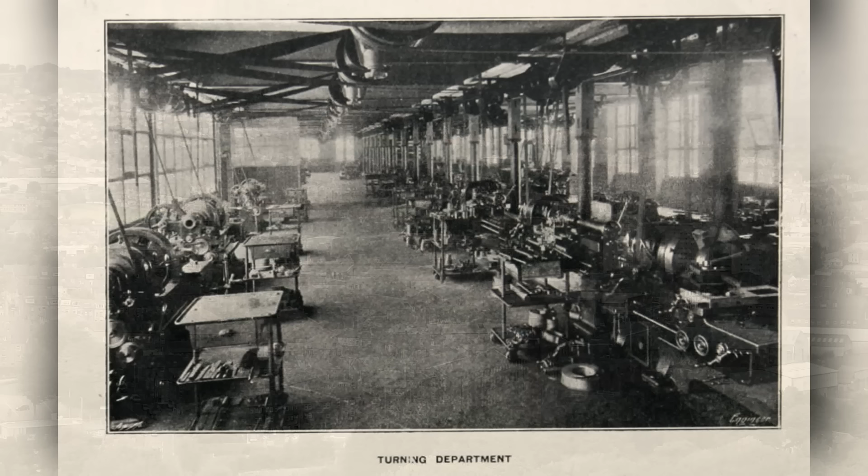Stand for a moment where it started, beside the Worth, under the gritstone moors, in a town that once arranged its holidays around a works. There were three men and a borrowed field, and an idea so simple it could be said in a single breath: that a machine's worth is measured not by what it costs to make, but by how long it goes on being true. They built a firm on that idea, and the firm built the machines, and the machines built the engines and the ships, and the guns and the locomotives, the tools, behind almost everything Britain made for a hundred years.

When the nation needed lathes to arm itself against Hitler, this one small works in Yorkshire made a fifth of them. When Rolls-Royce needed to build the engines that would fly, it reached again and again for a Keighley lathe. And it fell, not through arrogance, not through one great blunder, not through a proud refusal to change. It saw the future clearly and it built for it, from that first numerically controlled lathe in 1968 to the Slant 200 at the very end.

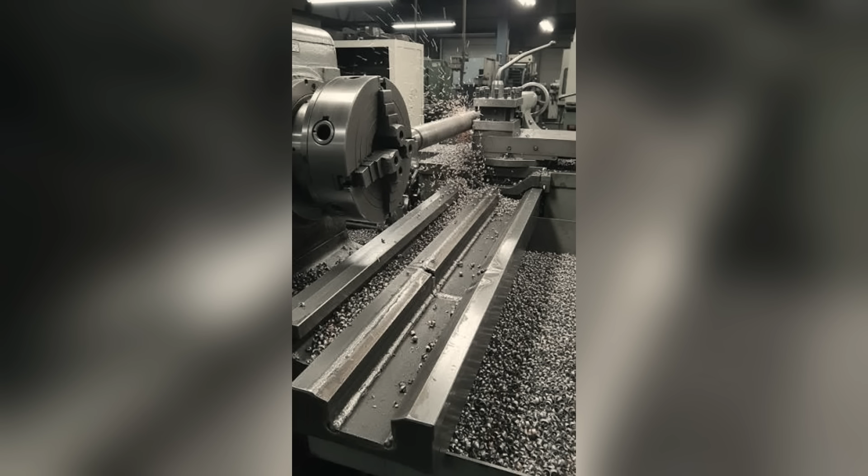It fell because the whole industry it belonged to was dying at once, because a strong pound priced its work out of the world it had sold to for a century, because a distant parent, tied to it in good faith, ran out of money to save it, because a foundry, the beating heart of the thing, was left to starve when there was nothing left anywhere to feed it. Tragedy here did not arrive as villainy. It arrived as a long series of reasonable decisions, made by decent men under pressures none of them could master, until, a fortnight before Christmas, the gates closed.

The men are the thing to hold on to. Donald Booth, scraping a single bearing for the better part of a week until an instrument could find no fault in it at all. Tommy Williams, who built the finest small lathe in Britain alone, at his own bench, for years, because he loved the work and wanted no other. The man who kept his made-to-measure white overalls for half a century and could no longer fit into them, and kept them anyway, because they meant something no one can hang up.

They are all gone now, or very nearly, but their work is not. Somewhere today, in a railway workshop, an oil field machine shop, a museum where a wheel still turns, a Dean Smith & Grace lathe is running. Sixty years old, seventy, still holding a tolerance that shames the machines that outlived the firm that made it. It does not know its makers are gone. It does not know its town lost its works a fortnight before Christmas in 1992. It simply goes on doing the one thing it was built to do, better than almost anything built since, because the men who made it could imagine no other way of making anything.

That is what the silence in Keighley keeps. Not a ruin, not a lesson. A standard, held in cast iron and scraped steel, still true after all this time, in the hands of people who never knew the men in white, but are grateful, every working day, for what those men left behind. The works is quiet now, but listen to a DSG under load, somewhere in the world, cutting clean and true through hardened steel, and you can still hear them.